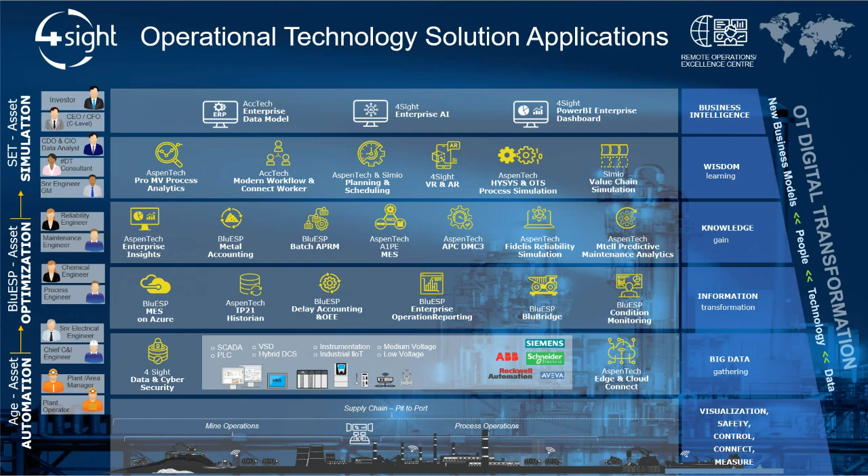So that gives you an idea of what we do. If we go a little bit deeper into BluESP specific, the company that I lead.

So how we see ourselves is a very agile company, and a company with multidisciplines. So we've got a bunch of chemical engineers, mechanical engineers, electrical engineers, data scientists, all working together, providing value to our clients. We use Aspentech as our role models, and we basically use the intelligent technologies to bring value to clients.

Now the type of technologies, when I talk about intelligent technology, they use things like embedded AI, machine learning, deep learning, basically now in all their disciplines. So they bring it into advanced process control. We will show you later in the series a bit more how they do that, but they're also in MES systems. They start using that right now as well to work those data. And also you'll see a lot of that today in this asset performance management presentation.

And so if we look at the technology sets that's basically available from Aspentech, the first one is the design technology. So really focused on how do I design greener and more sustainable plants. If I was building a new plant right now, I want to run it optimal, and that's what we do there. So they focus on things - there's a whole set of tools there that helps you simulate a complex process, design it, cost it, and build it to its optimum point. Really the EPCs, the largest EPCs of the world, uses a lot of that technology.

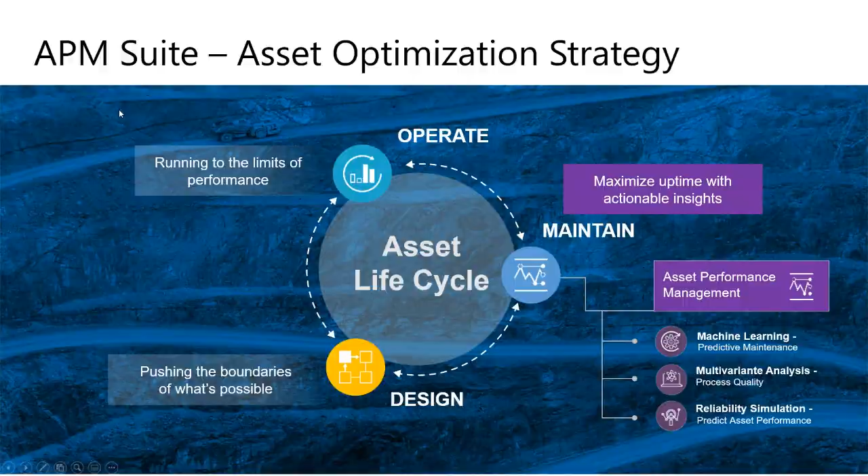Asset performance management success criteria: in order for you to get predictive and prescriptive actionable insights, it takes three important inputs - the years of valuable data that is saved in your historian, then you add in some analytic solution like Mtell and a bit of domain knowledge, and then gone are the days of unplanned downtime. You are then in control of your asset.

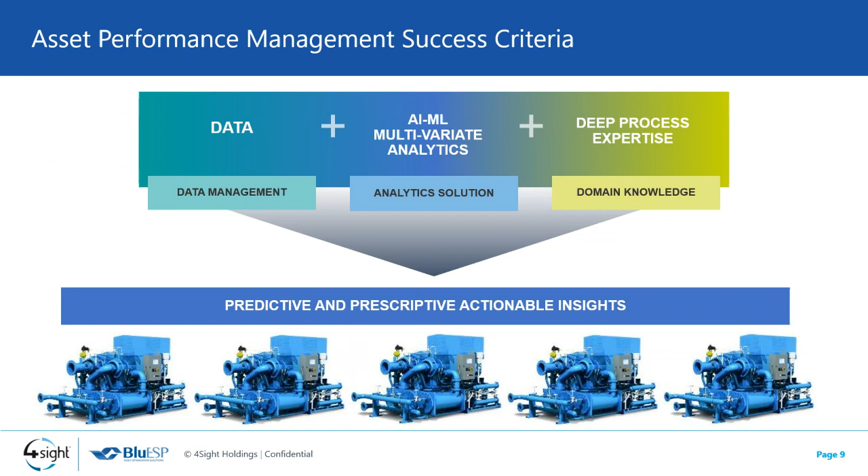Next, we will talk about moving towards this prescriptive maintenance philosophy. So the evolution of asset maintenance strategies has given industry the ability to digitally transform the way maintenance is done, and it has equipped them with the power of knowing.

Your earlier maintenance strategies included reactive and preventive maintenance, and these are still very widely utilized methods. But I think it's now time to ask yourself if acting too late and too early is working. With predictive maintenance, one will receive an early warning at the onset of the predicted failure, which will give you enough time to plan and strategize your maintenance.

However, the step into the future consists of prescriptive maintenance. Simply put, prescriptive maintenance solves that frustration of don't just predict, prescribe a solution. It provides earlier and easier detection by detecting changes in your data to tell you what failure, when will it occur, why is it failing, but it takes it a step further and it recommends a solution.

So to adopt prescriptive maintenance, an organization would need 4 important initial steps. You would first need to check your readiness. We will touch on this later on.

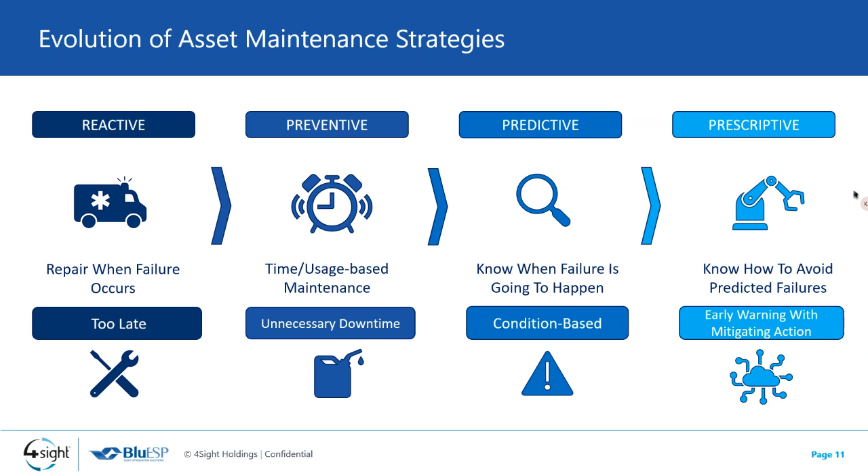So when trying to migrate to a prescriptive, sorry. Sorry, I'm just having a bit of technical issues.

So why should you choose prescriptive maintenance? Most industries suffer from very high maintenance costs, and this can be due to the cost of spares, procurement of it, delivery of your spares. But with prescriptive maintenance, you have the ability to decrease your downtime. It allows you a lead time to make coherent decisions and gives you better utilization of your resources.

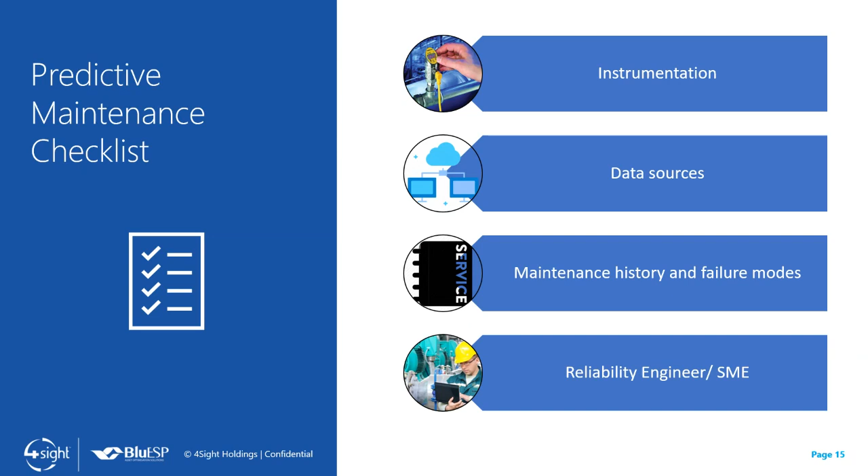Okay, next we will talk about the hurdles to overcome. So the hurdles that you would need to overcome, like anything, there are hurdles. But once you overcome them, the value it brings to your organization will make these seem minute.

The first and most important being changing the workforce culture. So many in industry have this mindset of, if it's not broken, don't fix it. But it is vital to get every single person to adapt to the idea of early warning and solution recommendations. This change would need to take place throughout your entire organization.

From finance and procurement, you would need to convince them to buy spares for an asset that has not yet failed. And then your artisans, because you would need to prove to them that by intervening before any sign of failure is actually the best approach.

Next is the limited CapEx budgets, which are faced by most industries. And finally is the regulations. So some regulations do not allow for the traditional approach to be replaced by prescriptive maintenance. An example would be your required maintenance on, say, pressure vessels or PRVs. In cases like this, you would have to opt for scheduled maintenance to obey regulatory bodies.

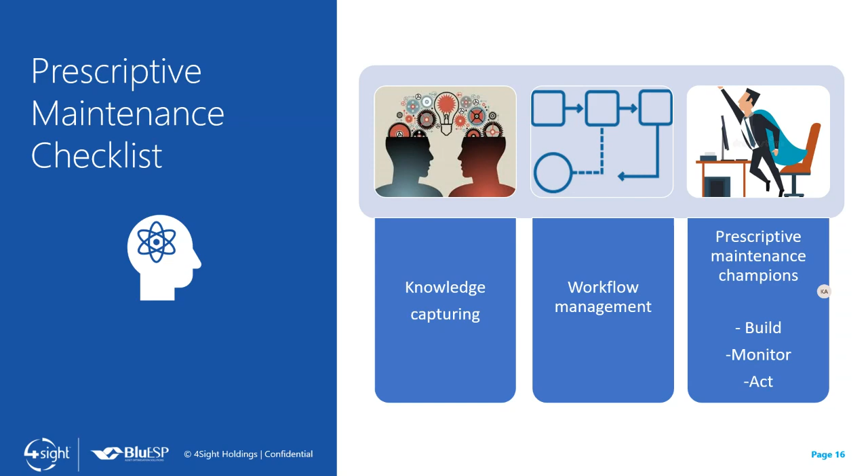Today I'll be speaking about the potential for prescriptive maintenance in the MMM industry, and I'll also give you an overview of the solutions that exist at the moment.

So what is the opportunity that lies in the mining, metals and minerals industry? Well, for starters, the industry is quite asset intensive, and that presents a lot of opportunity to transform your maintenance function from a cost center to a value center. And these things are all coherent with the technology that you use in your organization. Without this technology, you won't be able to connect your people to your plant or your plant to your processes, and from your people to your processes.

Some of the advantages and opportunities that lie within prescriptive maintenance, including Industry 4.0, is the ability to monitor your assets remotely and provide decision support to your plant, even though you aren't on site. It will also allow your workforce to identify critical problems much faster and solve them much faster.

In essence, you will be able to increase your safety, protect your environment, and also contribute towards sustainability and continuity of your workforce. At the end of the day, the competitive advantage from adopting this technology will give you the greatest leap ahead, far greater than any financial value that you can receive.

At the same time, your enterprise will also have visibility on all its assets, and the utilization of these assets will also contribute to the return on investment.

Transforming your maintenance function also includes faster turnaround times on work requests. You can manage and reduce your operational risk. So if you see any risk coming up in terms of assets and downtime, you're able to plan accordingly.

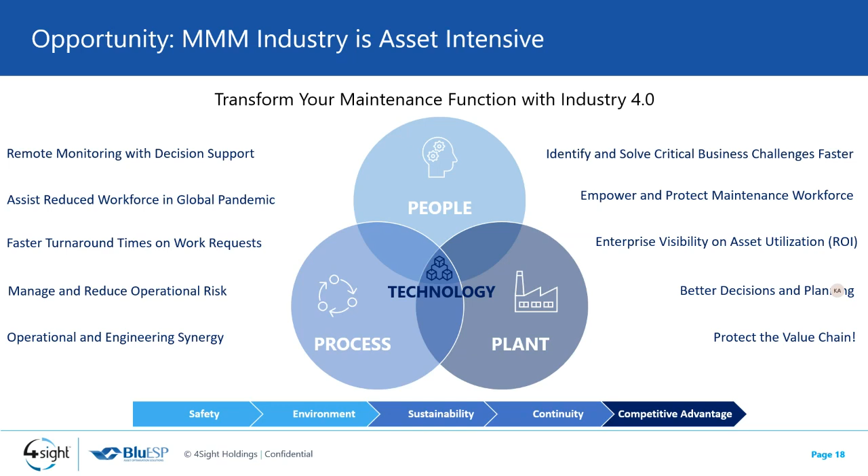Lastly, you also find that you'll achieve operational and engineering synergy. What I mean by that is there's usually always an offset between production and engineering, or production and maintenance. This is where you can see the balance starting to fall into place. At the end of the day, you'd be able to protect your value chain, whether it be in mining or metals or minerals, or any other industry, for example.

So where do we start with creating value with prescriptive maintenance? With Industry 4.0, machine learning and artificial intelligence, we can extract value from years of historical data, learning what happened in the past, how it happened, and why it happened. We can identify when and how to avoid future events from occurring.

This will also help your workforce maintain continuity, because in industry there's a lot of turnover and people tend to move on as well as retire. We have a new workforce that comes in every generation, and the knowledge captured from one generation to the next is a powerful entity within any organization. Specifically in prescriptive maintenance, this allows you to capture all the information done in the past regarding root cause analysis, equipment criticality analysis, as well as your failure mode, effect, and criticality analysis.

At the end of the day, we're also enhancing safety because we're continuously monitoring our assets. Most of us know that safety incidents always occur during startup or shutdown. When you have eyes on all your assets 24/7, you're able to see these safety incidents coming and act accordingly.

Prescriptive maintenance also allows you to optimize your planned maintenance activities, and using a data-driven approach you can actually reduce the amount of planned maintenance activities that exist in your organization. Some examples we see in industry: some plants and their maintenance functions are only able to get to 20% of their scheduled work orders, and the rest remains just in a pile.

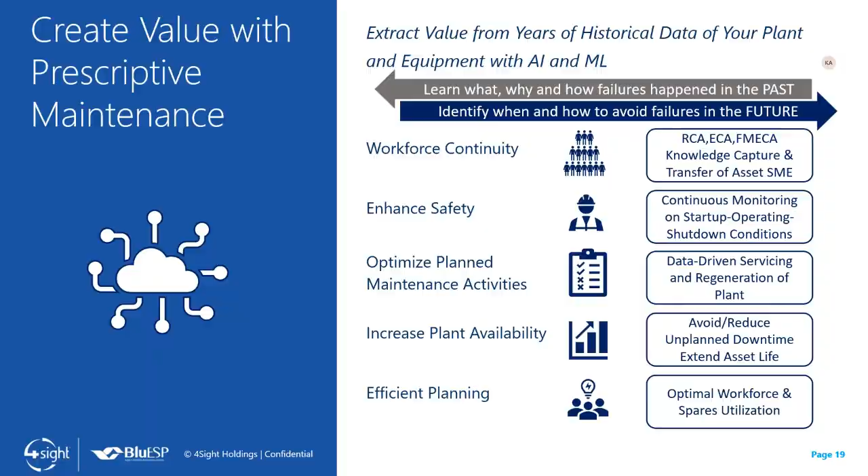So what is the real enterprise value? Time to plan around these predicted failures. If you look at any organization, you will see that having more time to plan means having more time to make the right decision, and this will impact all the chains along the value stream, from planning and scheduling, production.

And feedstock, to even your inventory and sales. And lastly, your maintenance function will be centered around all of this. At the end of the day, you're able to reduce a lot of your operational costs, maintain your safety and revenue, and also increase employee effectiveness.

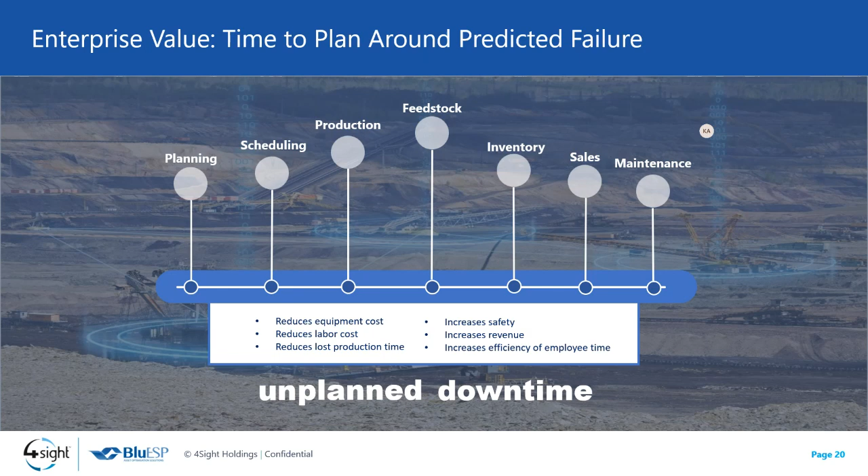Now I'll provide an overview of Aspen Mtell prescriptive maintenance solution. Aspen Mtell was designed based on reliability engineering.

And if we look at the reliability curve, which is the probability of failure, most solutions always sit in between the point where damage has already occurred or failure is bound to happen. And this is where Aspen Mtell is a differentiator in the market.

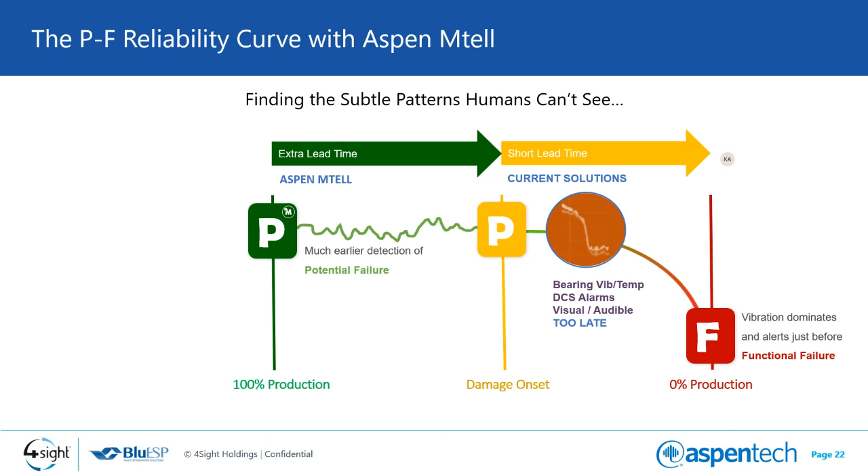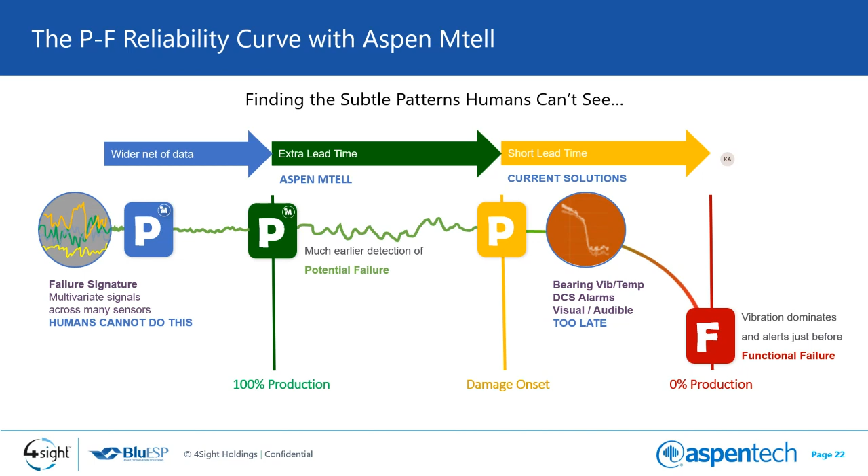Mtell is able to provide an extra lead time with much earlier detection of potential failure, and it does this by looking at a wider net of sensors. Most prescriptive maintenance solutions only look at what's happening on the equipment itself, whereas Mtell is able to look upstream and downstream and give you a wider net of sensor data that's able to predict the potential of these failures from occurring.

The value of early warning is the basis of Mtell. Catching these small failures before they become catastrophic is the most important part of this process. If you're able to see these patterns developing much earlier in its stages, you're able to do something more effective to either stop it or prevent the damage that will occur.

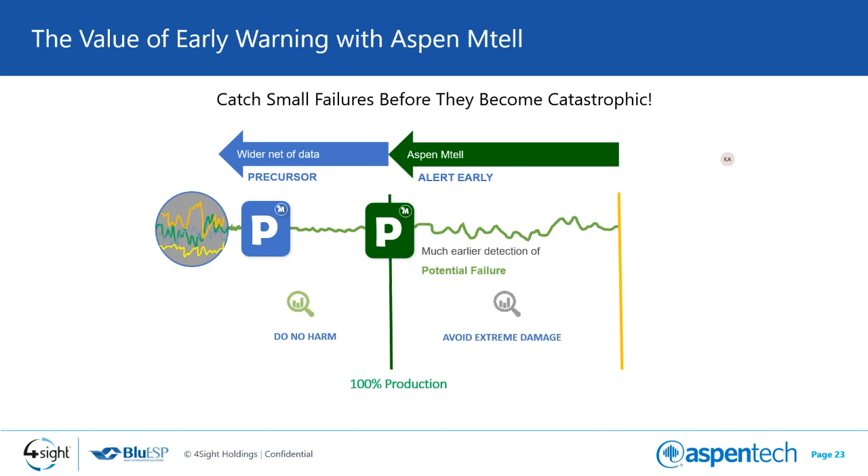When Aspen Mtell alerts quite early, you will see that this potential failure can be avoided. And there are two levels of action in which you can take. The first action, which is the most common, is to reduce the downtime and the equipment damage, and this would be done by scheduling maintenance in order to correct the problem.

The second level of action is much more sophisticated, and more prescriptive value is gained from this. Here you're able to avoid downtime completely, as well as save the equipment from failure. And the ability to do this is to apply operational changes that move the equipment away from the failure stage.

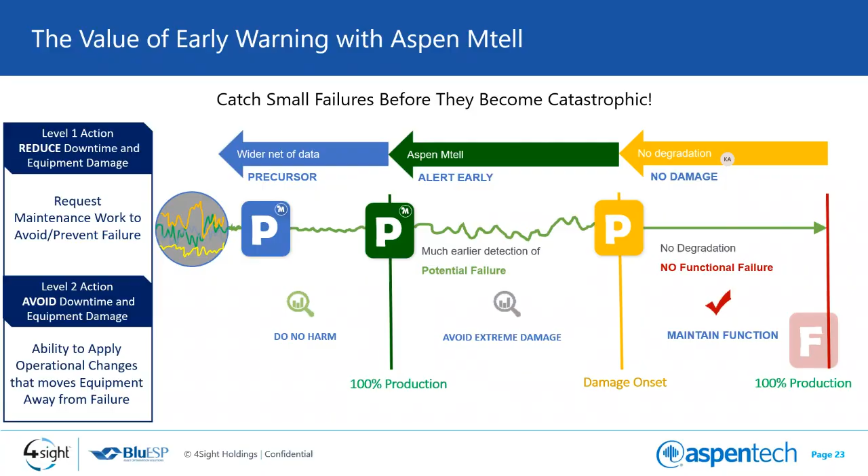So Mtell is a commercial software which allows you to automate a lot of the data science so that your reliability and maintenance engineers are able to focus on solving the problems that they can use their domain knowledge with.

They can also look at the failure events by looking at the maintenance history. And lastly, they can train and test the failure prediction. In machine learning terminology, this software allows an engineer, such as a reliability or maintenance engineer, to do feature engineering and feature selection. And all of this becomes bundled up into what they call autonomous agents.

These autonomous agents basically just predict and prescribe failure pattern recognition. And what they do is they're able to detect unique failure signatures with multiple failure modes, as well as cascading failure modes, where you see one failure leads to the next. It's also able to detect early stage failure by looking at a wide range of patterns.

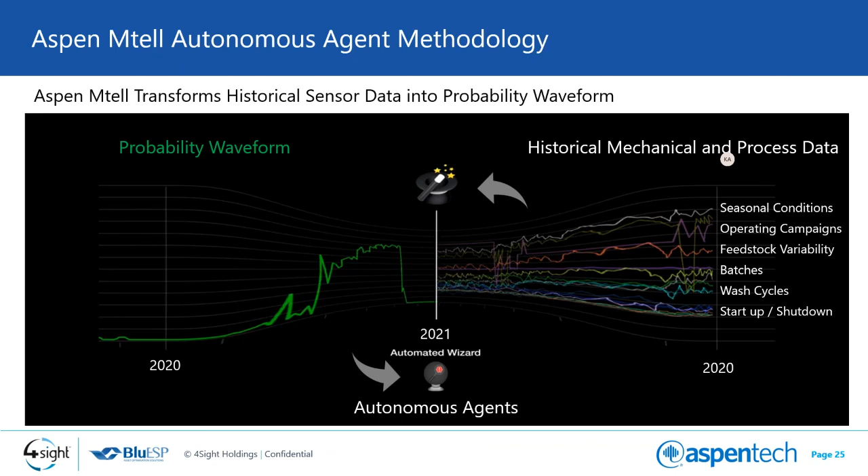into a probability waveform, i.e. probability of failure. And when you start to see increase in probability of failure, you know when to do something about it. And this methodology also takes care of the variation in your data, whether it be seasonal conditions, different operating campaigns, as well as startup and shutdown conditions and different wash cycles, for instance.

In an end-to-end solution, Aspen Mtell provides a range of functionality, from machine learning to failure patterns and abnormal conditions. The solution is able to plug into different data sources such as your historians, as well as your maintenance systems, commonly known as enterprise asset management systems or computer maintenance management systems. This is where you start to overlay your maintenance history with your historical process or mechanical data.

With the interfaces provided, you're able to one-click and retrain your agents to predict these failures. There's also prescriptive responses built into the system, which is able to write back into your maintenance system. When you receive an alert, you're able to prescribe a work order or prescribe maintenance activity that needs to be done. These are also provided by emails and SMSs, which are sent to designated engineers and people that will take action and investigate.

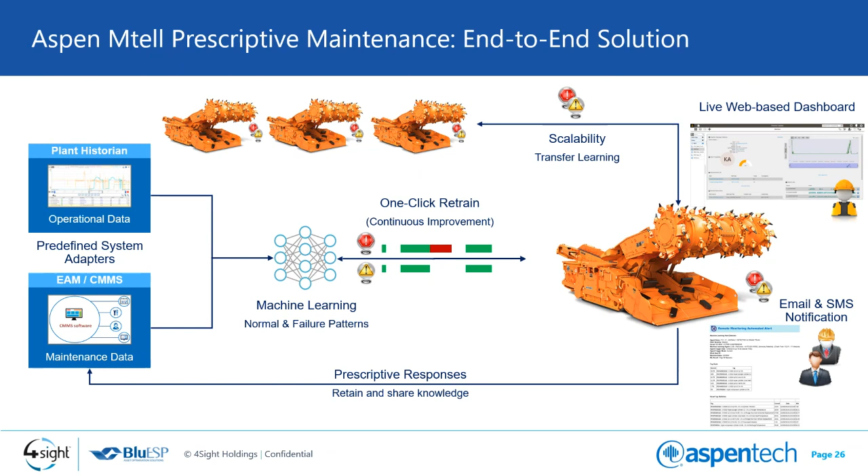On the overall solution, there's also a live web-based dashboard which allows you to view all the assets that you're monitoring in real time. You can also prescribe work and generate work from this dashboard. One of the fundamental aspects of Mtell is the scalability, or transfer learning as it's known. This ability allows you to scale your visibility on assets by transferring models or agents that you built on one asset to other similar assets, as you can see in the example.

So Aspen Mtell is able to work on any asset. These are some of the examples that we have applied Mtell in industry, and these are critical to the value chain and allow organizations to maintain productivity as well as safety.

Because Aspen Mtell is a data-driven approach, it is also OEM agnostic, meaning that it works on any type of equipment. We also have adapters that are built in to feed different OEM systems so that you can monitor those systems in conjunction with your historian.

It's highly scalable, meaning that you can transfer a lot of your learnings from one asset to another similar asset. This works well for mobile equipment, where you've got fleets of similar equipment and similar failure modes, but you don't necessarily have to train a model for each one. You can train on one and transfer to all.

It also allows for maintenance integration, so that whenever you have any alert, you can prescribe a work order, which will allow for maintenance to take action.

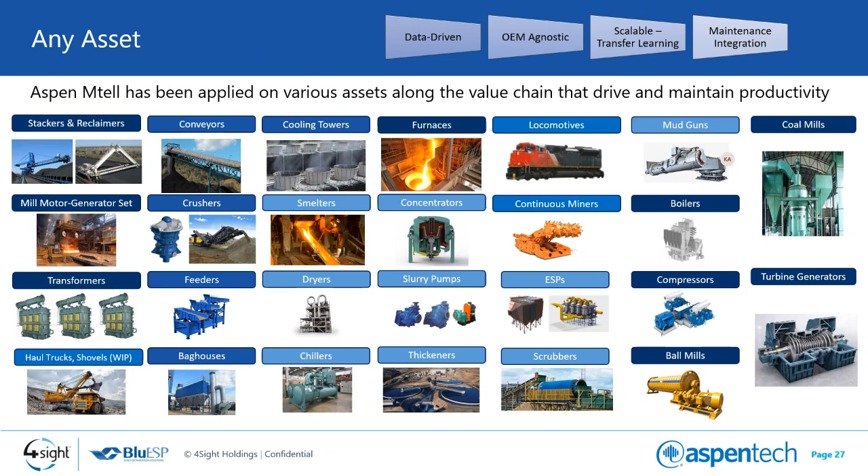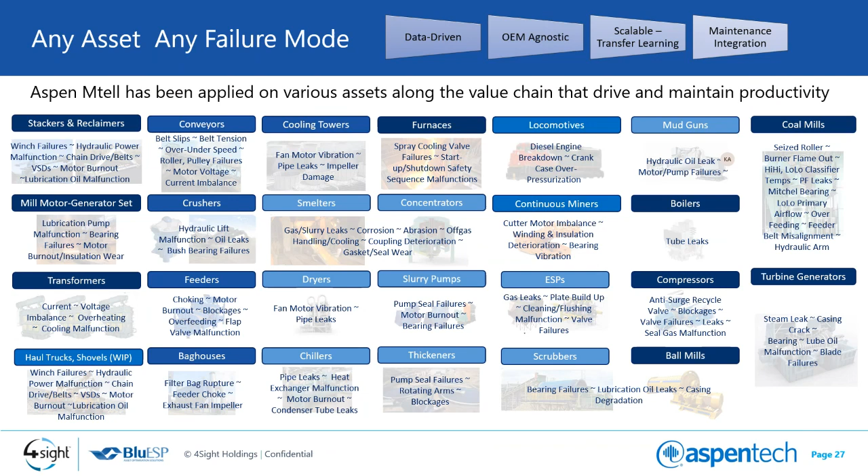Because it's a data-driven approach, any failure mode can be detected with this technology. Some of them are mentioned in the examples here on the screen, but based on the data that you have available, the sky is the limit. If you can see it happening in the data, Mtell will allow you to predict those failures with early lead time.

Now we'll go into some case studies where Aspen Mtell has been applied in industry. In this first case study, we'll demonstrate how Mtell has been applied in steelmaking, and particularly in a plate mill motor generator set. In this example, a generator bearing failure was predicted with 17 days of lead time.

Now in a plate mill, a motor generator set is used to control the speed, which is also used to control the slabs passing through the plate mill. This is critical for real-time processing because the temperature and the speed at which you process these slabs ultimately determines the production quality as well as the productivity of your plant.

So these bearing failures occurred in succession, as you can see in the example, and the repair cost is quite low in comparison to the production loss, which is quite high. If any of these bearing failures occurred while they're producing, it would force them to get rid of that piece of the slab and have a production loss without the ability to recover. So with 17 days of lead time, this will allow your maintenance team to plan around this and allow the schedule and maintenance to be done without impacting your production.

And the ease of the software allows you to build these type of agents within a couple of days. In this particular example, we built this agent within 2 days with the reliability and maintenance engineers because we had the right information, we knew what we were looking for, and we were able to demonstrate that it will give an early lead time.

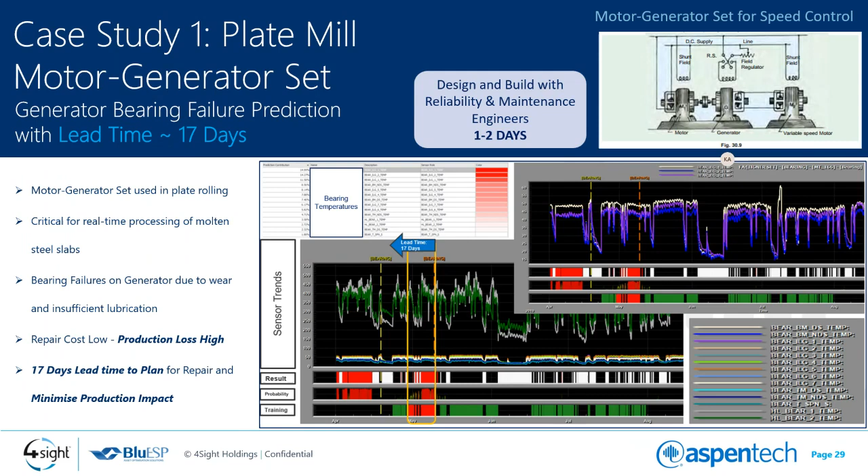In our second case study, we'll look at a turbine generator used in power production in a steam power plant. In this particular example, we predicted a casing crack failure with a steam leak with a lead time of 24 days. Now, as you know, steam generators are quite highly critical and high value assets.

And the production of electricity is to compensate for purchasing electricity. So any downtime associated with this equipment ultimately leads to additional electricity costs as well as a production impact if you aren't able to compensate for the downtime.

In this example, we predicted a steam leak, which was due to a casing crack, which had occurred due to a planned maintenance activity just before that. The reason for this is the casing was incorrectly fastened, and this resulted in increased vibrations on your casing, your bearings, as well as the steam pressure that changed.

Over time, this crack started to propagate, and we could detect this signature using a combination of mechanical and process sensors. As you can see, we've used turbine casing expansions, exhaust steam temperatures. We've even got some flows of the steam.

That's the power of Mtell, is that it doesn't only look at your mechanical data, which is common in industry for vibration monitoring, for example. We also combine this with the power of process data, looking at what's happening to the process when equipment is failing, and also what's happening to the equipment when the process is changing.

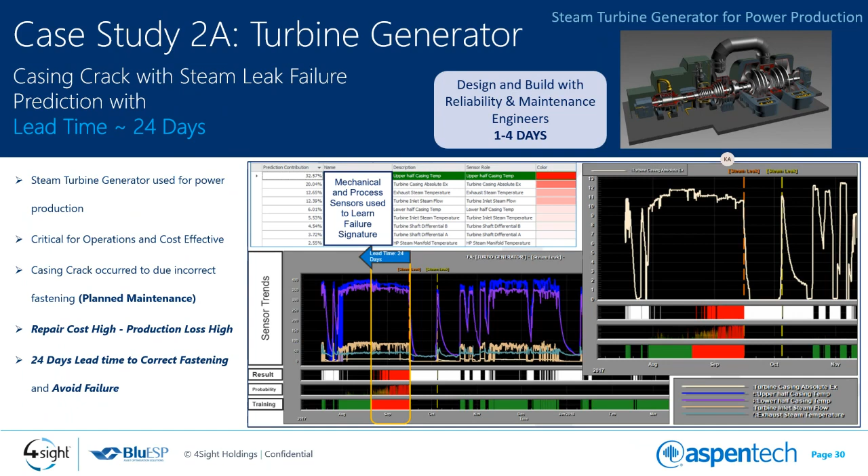So I've only been speaking about failure agents, but what about anomaly detection? In case study 2B, we look at the same turbine generator, but here we look at anomaly detection on the lubrication system.

What happened here, there was a malfunction of the lubrication system during a power disruption. And when the power came back, the lubrication system failed to start up again, and the operations continued to run without anybody knowing.

With anomaly detection, we're able to learn precise signatures of normal data, and we basically tell the software to look for abnormal pieces of data, whether it be changes in startup or shutdown, or just general operating conditions.

What you can see there is that just before the failure, the change in operating state gives a good indication that something is different with a couple of alarms.

And what we're able to do with Mtell is we're able to create a failure agent from this prediction. And this is the power of anomaly detection as well, is that we can create new failure agents to account for new failure modes.

If you look at the sensor data or the sensor trends of these bearings, you will notice that to the human eye, this looks quite normal or nothing out of the ordinary.

But with machine learning, you're able to see the precise changes in temporal events that the human eye would normally not see as abnormal. And with the failure agent, we were able to predict this failure with 8 days of lead time.

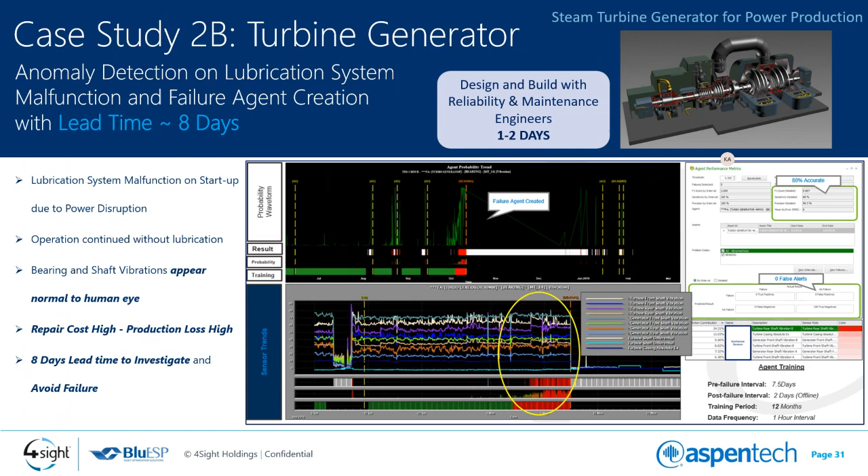In this example, we looked at a small piece of the equipment, or subcomponent, which is the cutter motors, which effectively do all the hard work. And what we found is that we've also used a limited amount of sensor data, meaning we've only used our phase currents and our motor temperature.

And these equipment are quite advanced and very new, so they're also quite expensive to repair. With 5 days of lead time, production and maintenance could plan around this by taking into consideration the downtime for their fleet of vehicles, by substituting a different unit or changing the motor before it got to that stage.

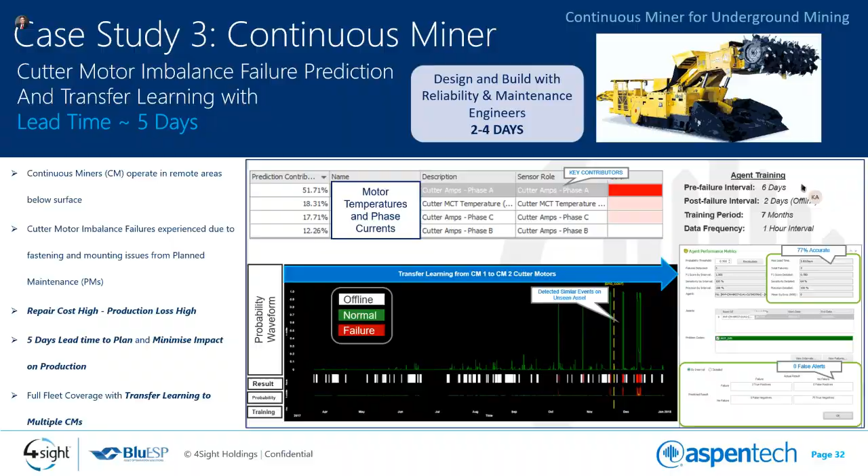I received a couple of questions. I've started addressing some of them, but we can review. So one of the questions was, what's the minimum period of data required for the solution to consume?

The big thing there is, you need a couple of weeks at least, because for anomaly agents, you basically need to be able to have a period of normal behavior that you can train the agent on. So also in the case, for instance, where you've got new equipment, this will definitely be the case.

However, you'll need a couple of weeks, but if you've got similar equipment that's existing - for instance a pump set which you've already trained and you know what normal behavior is - and you add a new pump without any history, we've got transfer learning, so we can apply that knowledge learned on the one pump over to the other pump, because we know what normal behavior for the pump is. That way we can mitigate that.

Then there was a question: if you are using historical data to train the model, how would it be of value if a maintenance history did not identify the correct failure mode? So the idea is to have autonomous agents, but we obviously still, when you train these agents, review the sensor data associated with that asset. You review the behavior of those sensors during a failure, or for the failure that you're training.